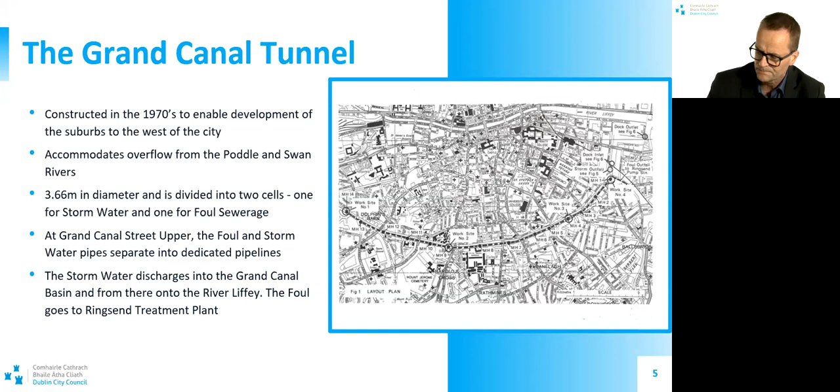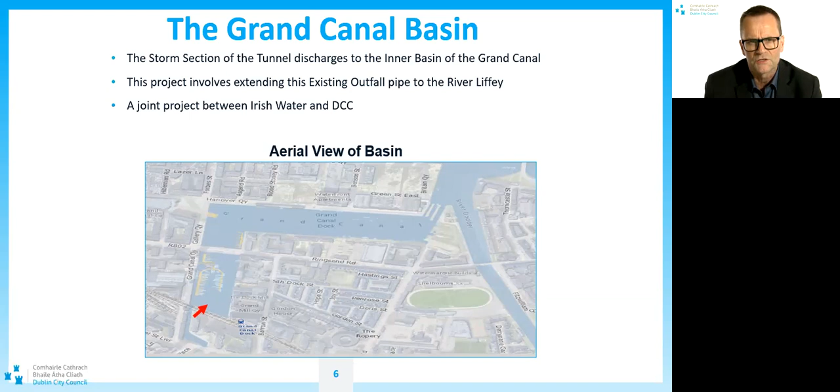So we just have an aerial view of the basin here for your attention. I'll just draw your attention in particular to the red arrow at the bottom of the aerial view. That's the actual point where the stormwater pipe is currently discharging or falling into the water of the inner basin of the Grand Canal. So that's the end of that pipe at present. Our proposed project involves extending this existing outfall so that it goes directly to the River Liffey. As Sinead mentioned earlier, it's a joint project funded by Irish Water and DCC.

So why do we need the project? Why are we proposing these works? Essentially, it's to improve water quality in the basin. The Grand Canal Basin is periodically impacted by microbiological pollution, particularly after heavy rainfall events. So it's not all the time, but it is noticeable after these events. This pollution manifests itself in the form of E.

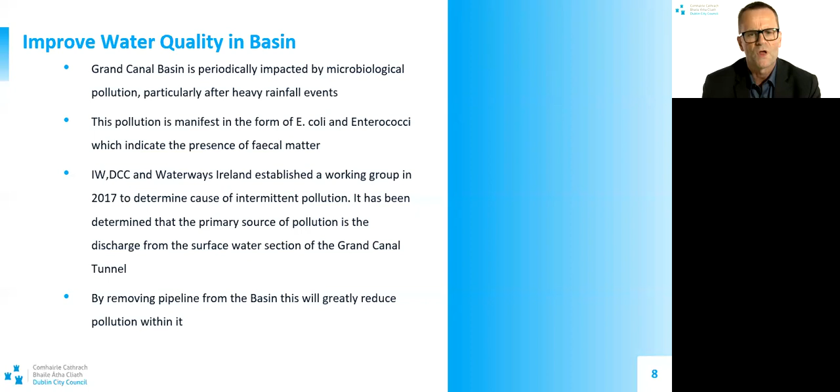E. coli and enterococci are known indicators for the presence of fecal matter. In 2017, a working group was established between Irish Water, Dublin City Council, and Waterways Ireland to determine the cause of this intermittent pollution. It was established that the primary source is the discharge from the surface water section of the Grand Canal Tunnel. Therefore, by removing the pipeline from the basin, we're going to greatly reduce the pollution within it.

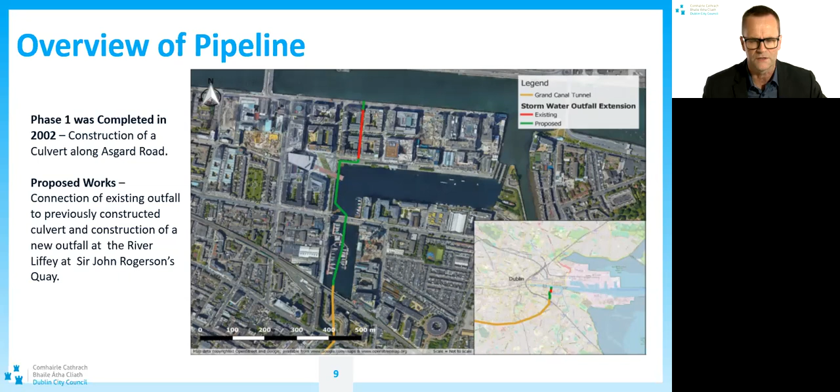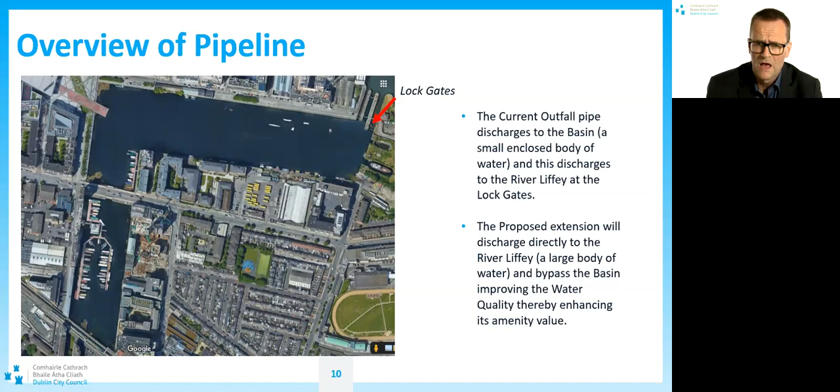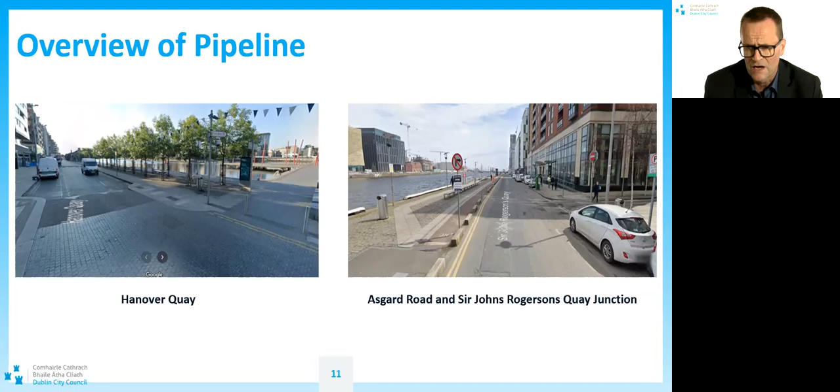On the right-hand side, we have a photograph of Asgard Road and Sir John Rogerson's Quay at their junction. Approximately where that gentleman is on the right-hand side is where we would hope to pick up the box culvert constructed in 2002, joining into it and extending an outfall structure across to the River Liffey, which you'll see on the left there.

Just some background: phase one, as I mentioned, was completed in 2002. At that time, permission was given for the full project, but it didn't proceed to construction. That permission expired when the Dublin Docklands Development Authority dissolved, which is why we need to apply for planning permission again for this phase two.

Our plans are to submit this planning permission application early next year in 2022. We would expect a planning decision to arrive in the second half of 2022.

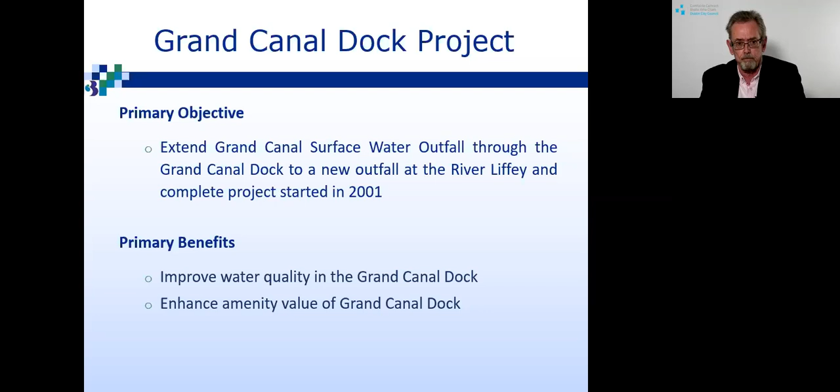Now, this area since 2001 has experienced considerable rejuvenation, and the basin itself has become a centre feature of the same. So what are we going to do?

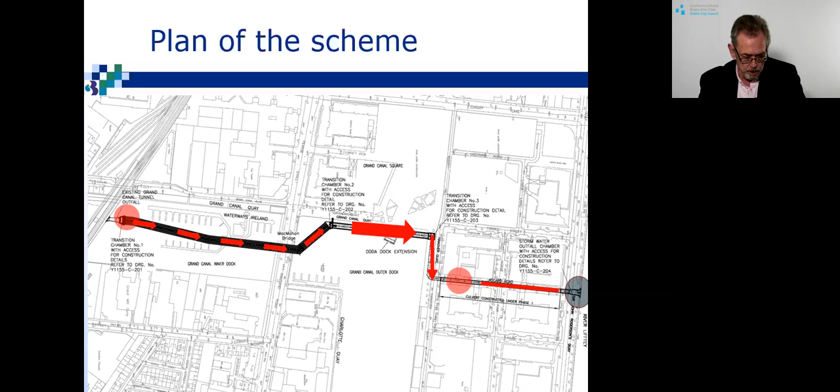So the phase 1 element - this was completed, as we said, back in 2002. It's basically a concrete culvert, an underground tunnel. At the moment it serves no purpose whatsoever, and we are hoping now to join up with it and make use of what it was intended for.

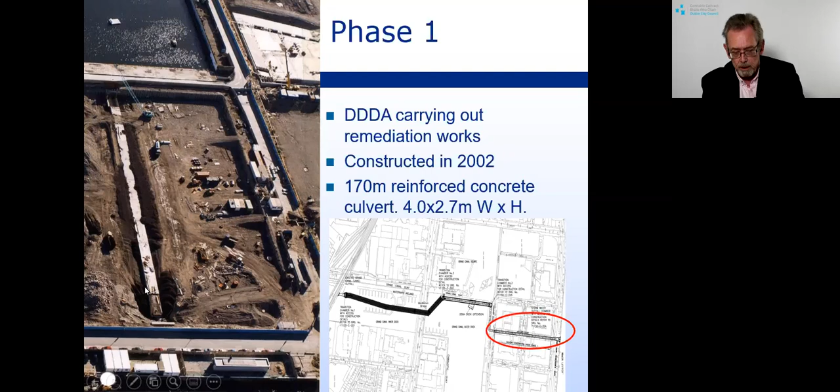It was constructed back then because the Dublin Docklands Authority were carrying out remediation works for the development of the area at the time, and it suited everybody to put in this culvert while they were doing it - less excavation, and there was a considerable cost saving. Phase 2, what we're doing now, is joining up with that.

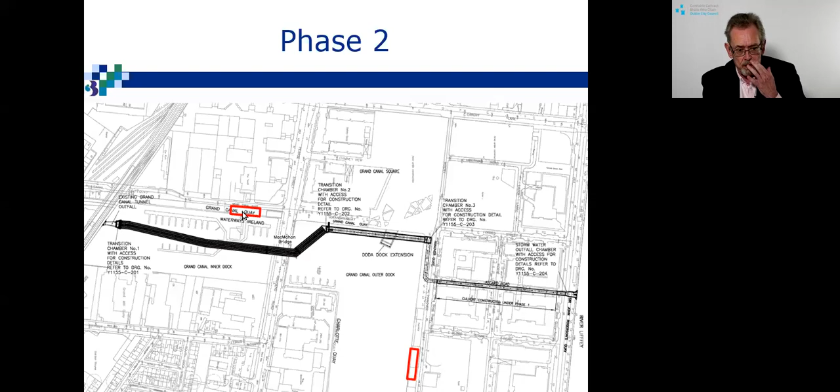On this diagram as well, as the construction takes place, there will be two construction compounds. The main one will be located at the end of Hanover Quay, and then there will be another small compound opposite the Waterways Ireland Visitor Centre, to accommodate the work in the inner basin.

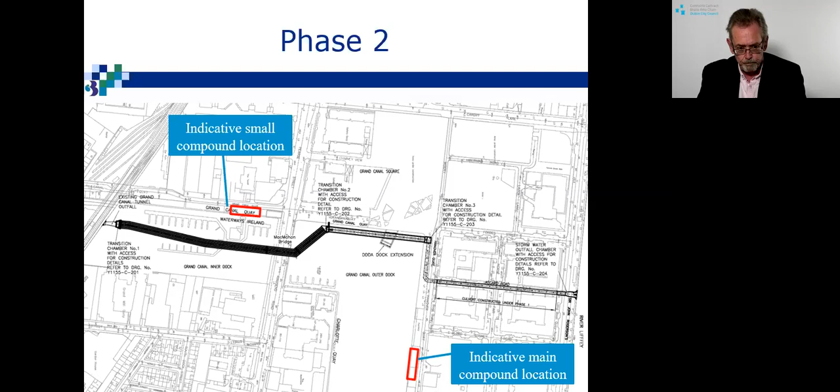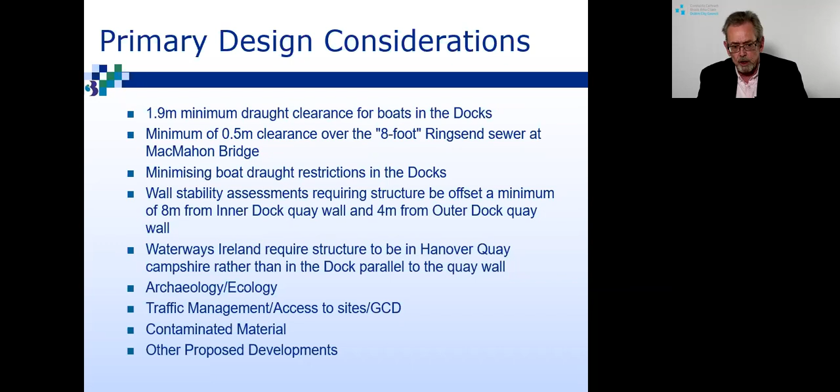Now, when we designed the route of this, there were a serious number of considerations put together in order to facilitate the future and present use of the Grand Canal Basin itself - things such as minimum draft clearance for boats within the dock, clearance under MacMahon Bridge, and wall stability. Waterways Ireland were consulted extensively on this. Archaeological, traffic management, contaminated material, and other things were taken into account, and we came up with our existing design and proposal.

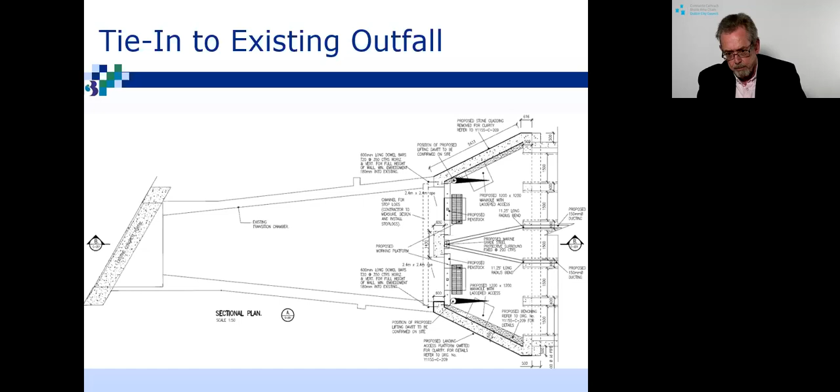First of all, we will be tying into the existing outfall, and this will involve taking the existing outfall and building an adapter to the end of it, which will have 5 pipes going along in parallel under the bridge. Along that route, the pipes will be laid on concrete cradles that will be dropped into the basin, then the pipes will be dropped in and encased in concrete.

That's the other point we would make - the moorings that are there will need to be removed in order to accommodate the construction element.

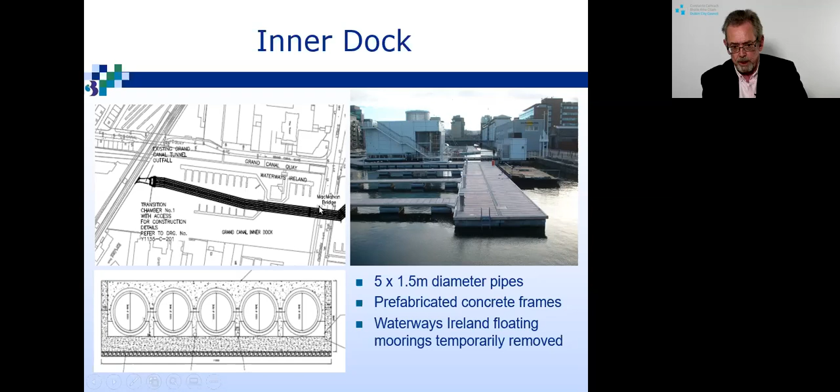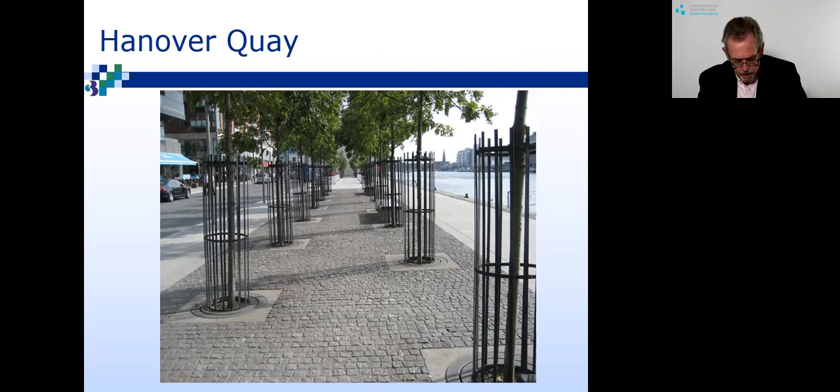So we come then down to the Hanover Quay side. Once we have passed through the basin, the Hanover Quay element is now back on to what we are calling the land element. All the rest in the basin will be taking place within the basin itself, and that should minimize disruption in terms of traffic, etc.

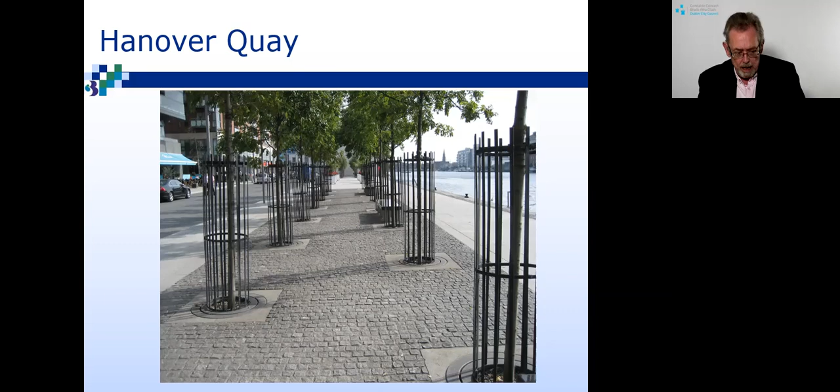However, there will be a disruption for this element. That's Hanover Quay as it looks now. We have to excavate a deep trench there to put in this concrete culvert, and then we have to fill that back in and basically reinstate it to look like that.

That's the transition chamber, or the adapter, taking the pipes from the basin through this and then into this concrete culvert that comes down Hanover Quay, turns along, and then we will break into the existing phase 1 culvert, and that would constitute the Hanover Quay element.

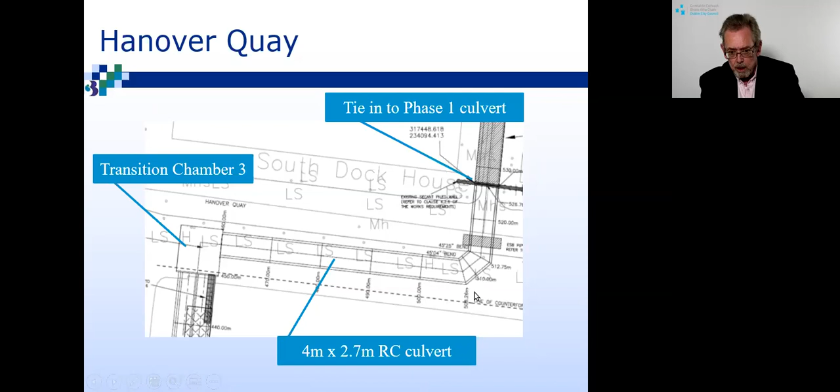Then we come to the far end. This is the far end of the phase 1 works. That's the River Liffey there, that's Sir John Rogerson's Quay. So we join up with this and cross Sir John Rogerson's Quay to a specifically designed outfall that will discharge to the River Liffey.

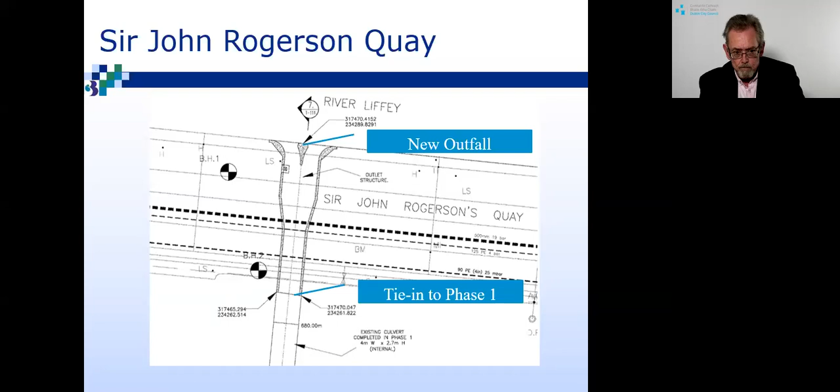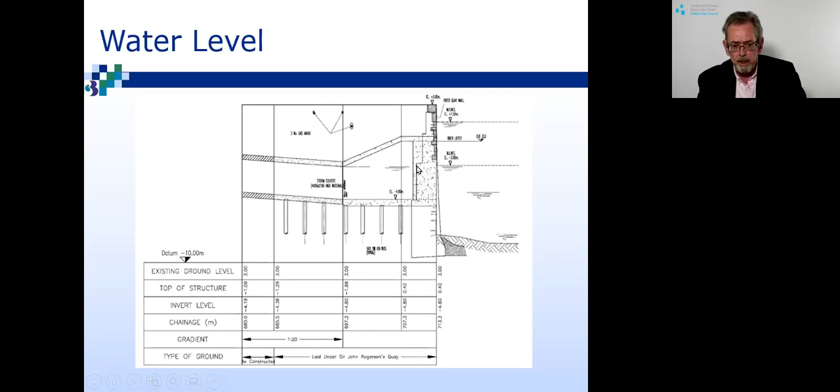This is looking sideways on the outfall to the Liffey. Just put this in to illustrate - it's probably one of the few elements of the project that you'll be able to see any evidence of afterwards. To do so, you basically have to be on a boat in the river at medium or low tide to see it. It will be completely submerged at high tide, and you will see the top of it at medium or low tide. So it will be unobtrusive in its operational phase.

So that, I hope, gives you a picture of what way it will be constructed, and what route it will take. Thank you for listening, and if there are any questions, I would be quite pleased to answer them.